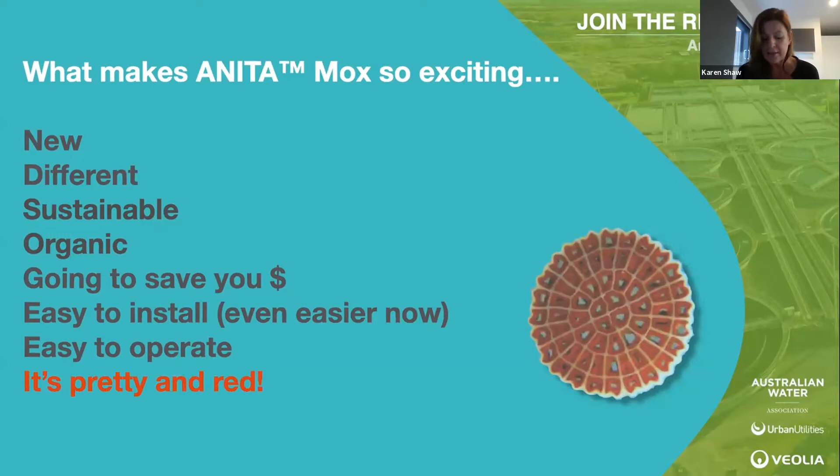And last but not least, the color of the Anita Mox plant will tell you a lot about how your process is performing. Let's not underestimate how great it will be for our operators to be able to look into a tank and have a good idea, based on the color, of how well the process is doing.

So that being said, I think it's time now to move to Romain's presentation, where we'll find out more about why we should all be seriously thinking about adding a splash of red to our boring brown wastewater treatment plants. So I shall stop sharing now and hand the reins over to Romain.

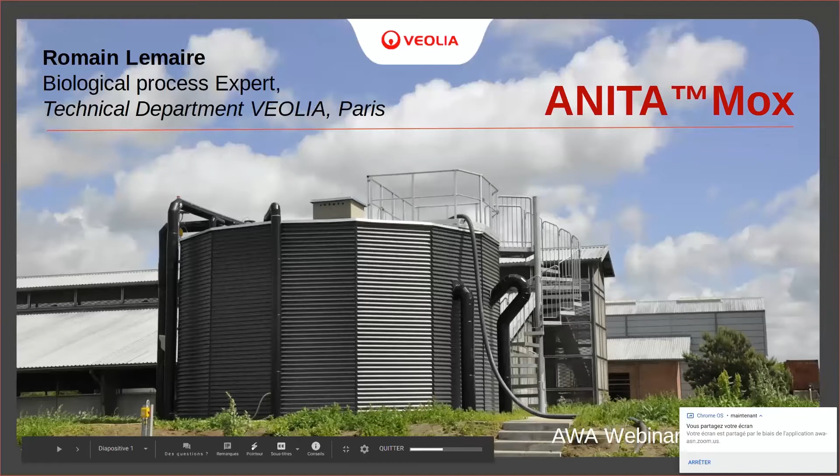So I'm going to introduce you to the technology, but first we'll talk a bit about Anita Mox itself and introduce you to the topic before jumping into the process itself. So let's start with what is Anita Mox, and before that, which is the Veolia process, what is Anammox in general?

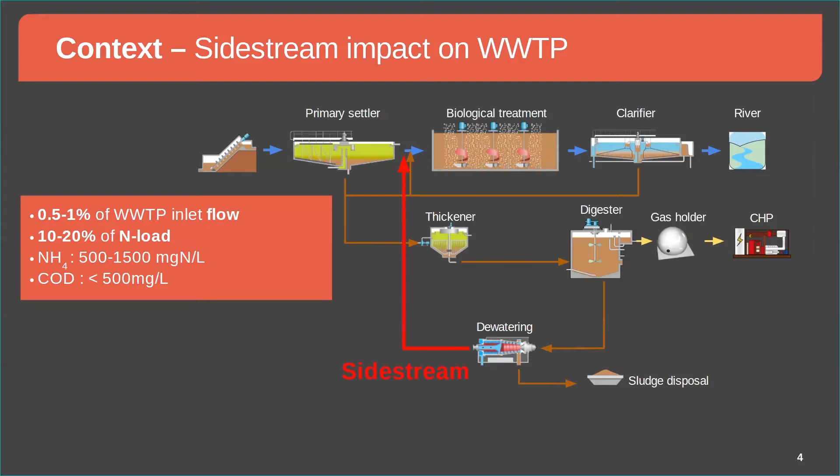If we look at the wastewater treatment plant, we can see a general layout with your water line at the top and your sludge line at the bottom. What we can see is when we start having digestion, when we want to make use of all the solids generated through your wastewater treatment plant, what we generate is what we call the side stream after the dewatering. This side stream is very little flow, 0.5 to 1% of the inlet flow of your plant, but represents 10 to 20% of your nitrogen load, which is significant. Ammonia concentration is usually quite high, and COD is very low, as we've made biogas out of it in the digester, so the carbon left is little.

What it means, and it's even worse, is more nitrogen when we add the THP, thermal hydrolysis, which is quite popular now in Europe, in the US, and also in Australia. This will just strengthen the side stream with even more nitrogen return, up to 30% of your inlet nitrogen coming through that side stream. The impact of that return is basically, in a biological treatment line, you're going to require more oxygen to nitrify that nitrogen load, so a bigger blower.

You return mostly nitrogen, little COD, so you unbalance your C/N ratio. For denitrification, you might end up having to add carbon into your system. And then you might put at risk your outlet ammonia and TN discharge limit, and maybe get fined for not being compliant all the time.

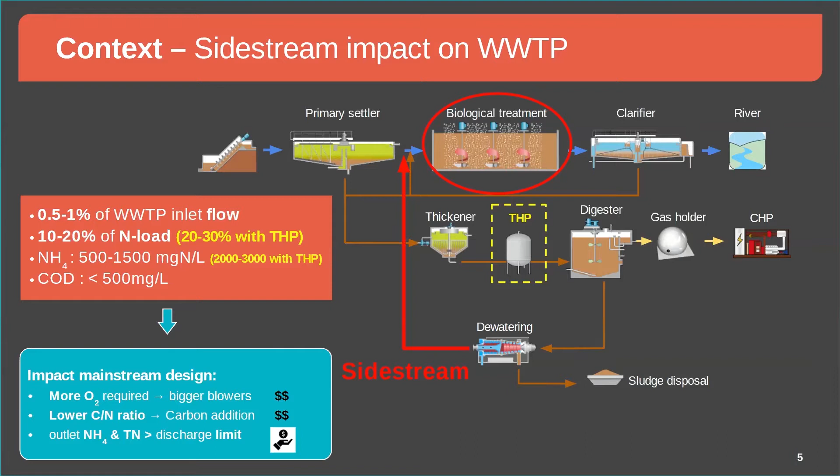That's why we developed this Anita Mox process to fit into that reject water, that side stream, and to treat nitrogen directly into the stream before it is recycled or returned back to the main plant. So Anita Mox is the name of the Veolia technology using the Anammox technology.

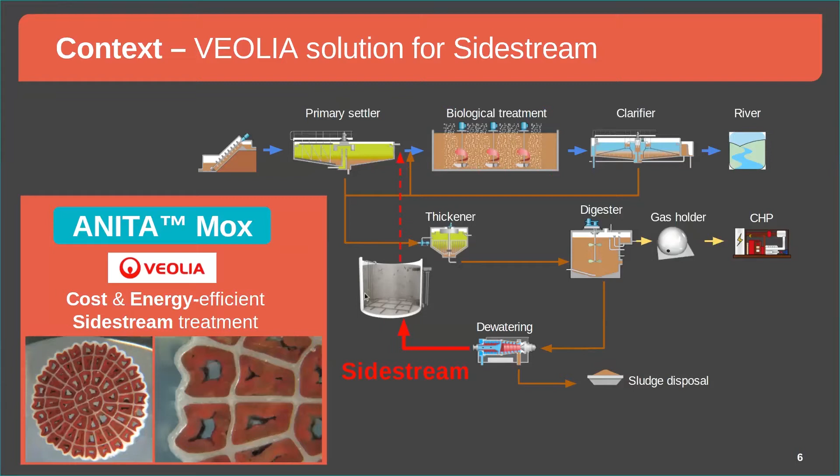And to denitrify down to N2. This is on the anoxic condition, no oxygen. And we need COD, carbon. For the Anita Mox system—so this is the conventional nitrogen removal pathway.

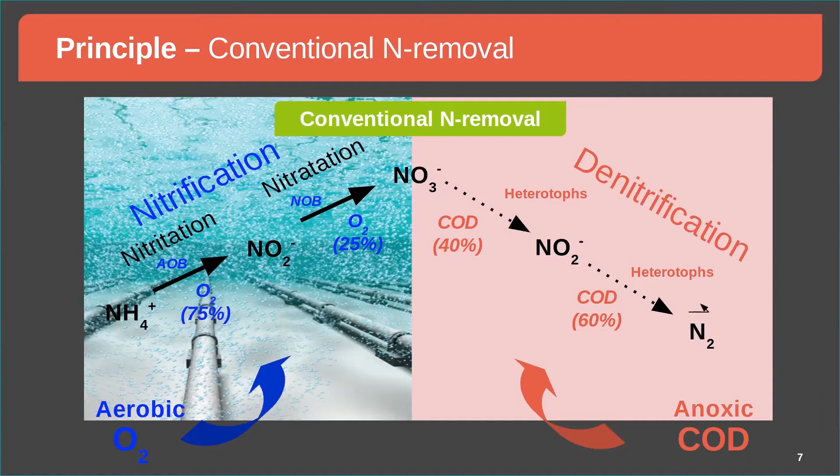With the Anita Mox, the beauty is we can reduce the oxygen need, and we don't need any carbon. We don't need any source of COD. So now we only need to nitrify to nitrite only, NO2, not all the way to nitrate, but only a fraction or a portion of the ammonia, around 50–55%.

And then with the nitrite and the ammonia remaining, the Anita Mox bacteria will do the job and will convert that to nitrogen gas and do the so-called denitrification, but with no external carbon required, which is really good for centrate because they don't have any COD. And then we can have a full nitrogen removal without the need of

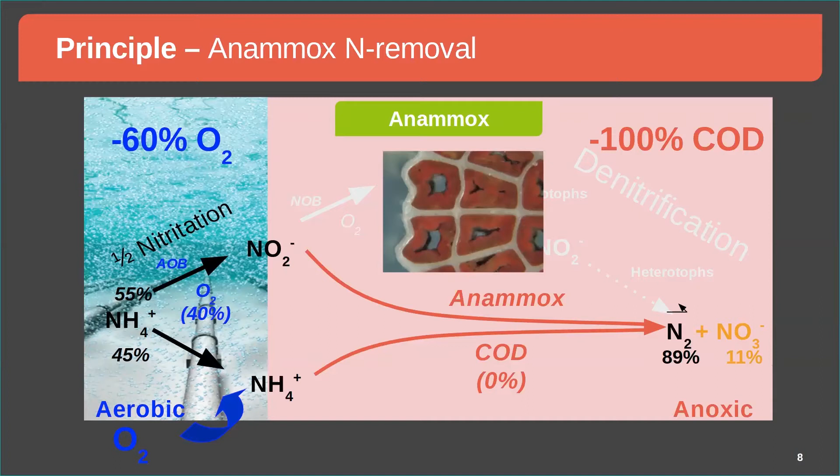So to summarize the advantage of the Anita Mox process compared to the conventional N removal with nitrification and denitrification: conventional N removal is a big slope to go up the mountain with oxygen, needing a lot of oxygen to convert all the ammonia to nitrate. And then downhill, we need a lot of COD, a lot of carbon to denitrify down to N2, nitrogen gas.

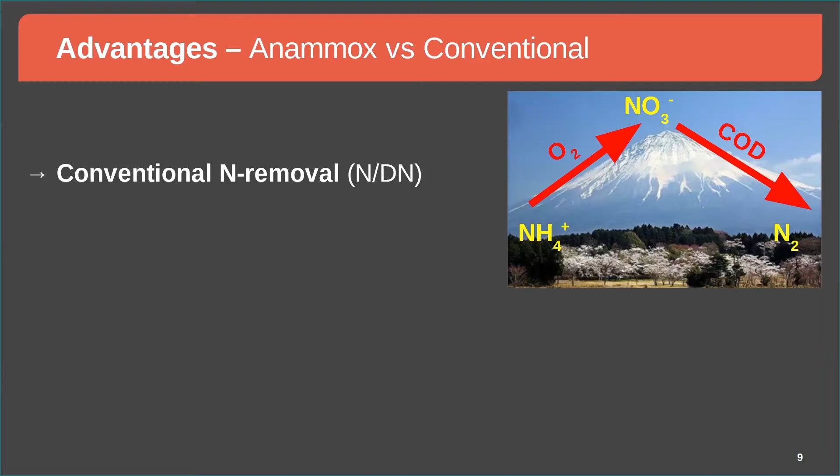With the ANITA Mox, it's a bit different. The mountain is a bit smaller, so it's more like Mount Fuji versus Uluru for you in Australia. But we need a tiny bit of oxygen, or less oxygen, because we only nitrify a portion of the ammonia and only to nitrite, not all the way to nitrate. And then with the ammonia left over, we go all the way to N2 with no COD.

So the advantage of this is less oxygen consumption—stoichiometric minus 60% saving—no COD requirement, so we don't need to add any carbon, and there is no carbon in that type of centrate. Obviously, less CO2 emission because we don't add any external carbon, and we use less energy for the aeration, and less sludge production as well, because that bacteria is a slow grower, and we don't use any heterotrophic bacteria to do the denitrification, which produces a lot of sludge.

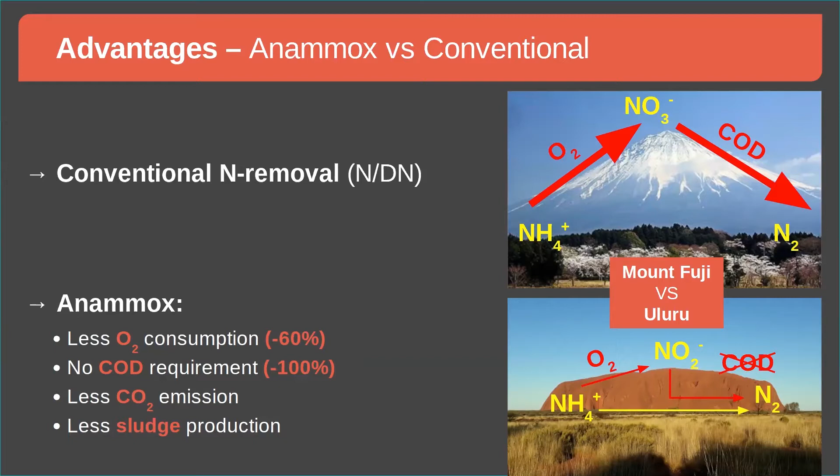So there is always some challenge. And why haven't we seen Anammox before in a normal plant?

For a few reasons. First, it's a very slow grower—challenge number one. If we compare the main populations involved in a wastewater treatment plant, we have the COD removal done by the heterotrophs, and the growth rate, or doubling time from one bacteria to two bacteria, is around an hour, couple of hours.

For the nitrification in orange, the nitrifiers, we know they're slow growers. So to make two bacteria out of one, it's around a day, 1 or 2 days, based on conditions. When we look at the Anammox bacteria, we're talking about 1 week, okay?

So the order of magnitude tells you that this bacteria needs the right condition and the right retention mechanism to stay in the system. This slow growth rate can lead to long startup when we want to start up these processes.

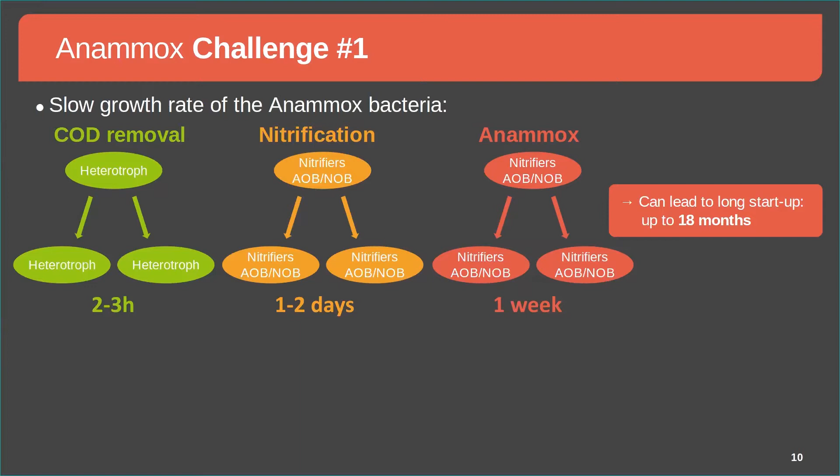We developed a special strategy at Veolia called the Biofarm, and the idea is to pre-seed with some Anammox into the system so we can start up quicker. We can get up and running quicker, and we can reduce the startup time down to 3 to 4 months based on the project. But keep that in mind—slow growers, so we need to give the right condition and the right retention of the bacteria into the system.

Challenge number two with the Anammox technology is we need, as you've seen, the substrate, the key substrate is nitrite, NO2. We need to make sure all the ammonia goes to nitrite, or a portion of the ammonia goes to nitrite, but not all the way to nitrate. If it's nitrate, the Anammox can't do anything with it.

So we need to keep it to the nitrite level. To do that, we need to make sure that those bacteria called NOBs, which oxidize nitrite to nitrate, are suppressed, or the growth is under control, and we don't have that in the system. We need very good aeration control to produce nitrite and not nitrate, and that's the key for the Anammox.

We need a bit of aeration to go to nitrite, but not too much. The Anammox don't really like oxygen, so we need to provide oxygen for the nitrification stage, but not for the Anammox. So it's a very sensitive parameter, aeration.

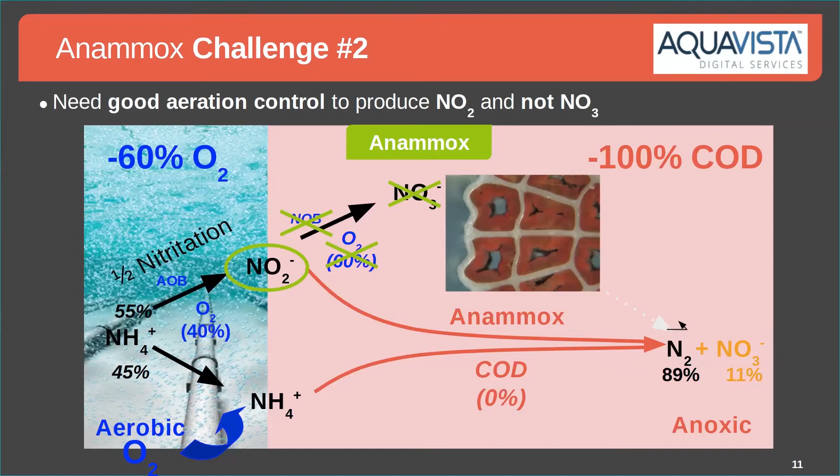And for that we have advanced aeration control through the Aquavista services, digital services, and that allowed our Anammox process, the Anita Mox, to be producing mostly nitrite and avoiding going all the way to nitrate. So that's the background of the Anammox.

Let's jump into the Anita Mox process now, the Veolia process. So it's based on the MBBR technology that some of you might have heard before, moving bed biofilm reactor, from AnoxKaldnes, which are the leader in that technology and are part of the Veolia family for many years now, based in Sweden. So the MBBR technology is very basic.

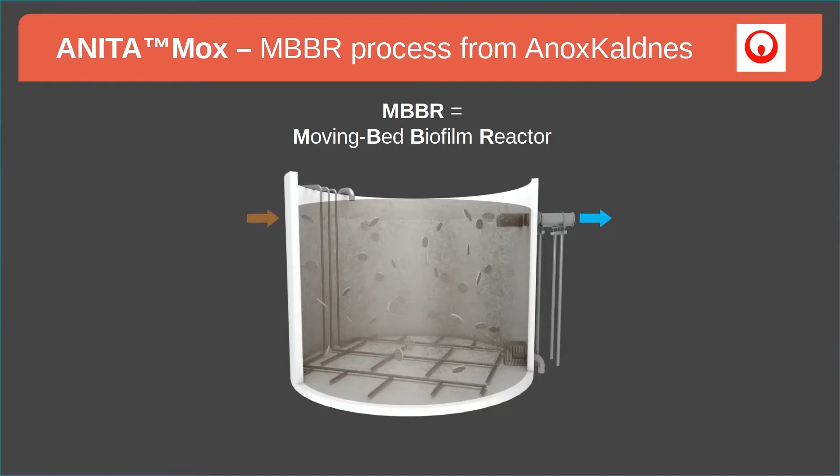But first, you have the media. You have one tank, you have media for the biofilm to grow. You have a sieve, what we call a sieve. It's to retain the media, the plastic media, but the water can go through in the outlet. So it's a physical barrier for the biofilm to stay in the tank.

And finally, we have an aeration system or mixing system when it's anoxic, but in our case, we need aeration. Stainless steel, robust, coarse bubble, but we can also use fine bubble for some projects and for the Anita Mox as well. But usually it's a robust aeration system.

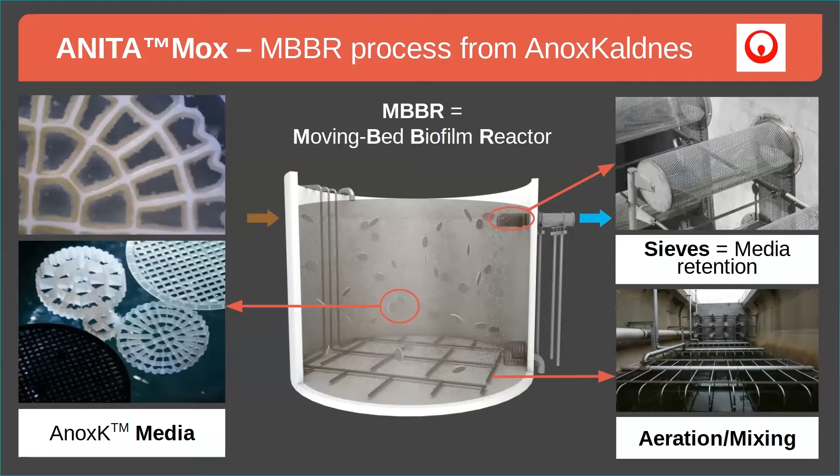So looking now into the detailed mechanism of the Anita Mox. As I told you, it's an MBBR process, but if we zoom into what happened on the biofilm, you see a picture of a K5 carrier with Anammox bacteria with that red specific color on it.

If we zoom into a little square, here we go. We have the media, the plastic media in dark, and then we have the biofilm growing on the top. We have the liquid, the bulk liquid around.

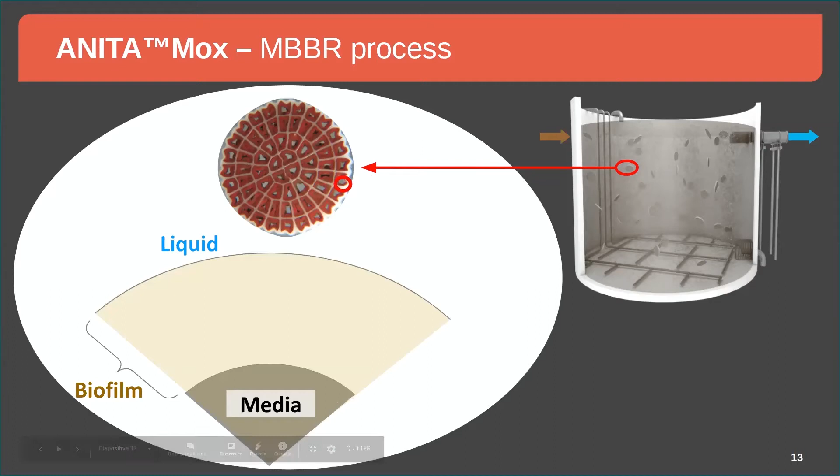If we apply some oxygen gradient, we're going to create simultaneously in the biofilm an aerobic layer on the outer layer of the biofilm, and deep in the biofilm we're going to have anoxic conditions with no oxygen. That's why it's key to control oxygen. We want enough aerobic zone for the nitrification, but not having the oxygen penetrating fully the biofilm, to leave that anoxic layer deep in the biofilm for the Anammox.

So what happens after with ammonia? Ammonia in the bulk will diffuse into the biofilm, will be used by the nitrification, those AOB bacteria, the nitrifiers, on the outer layer of the biofilm using oxygen.

And then the produced nitrite and the leftover ammonia will diffuse further in the biofilm, and the Anammox will be located deep inside where the oxygen is not present. The Anammox will finish the job, converting nitrite and ammonia into nitrogen gas. So that's what happens in reality in this Anita Mox process on the biofilm, all happening simultaneously.

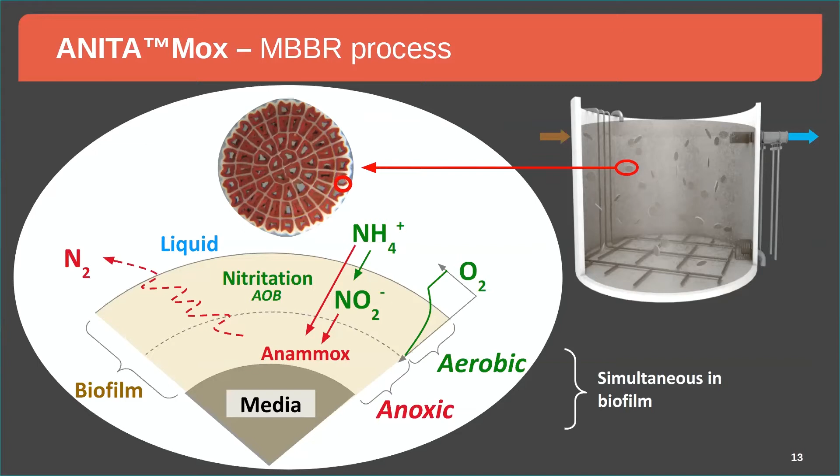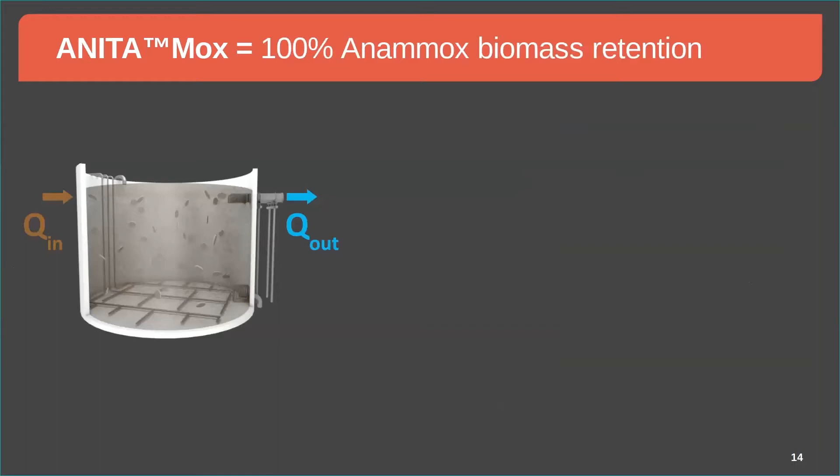Another big advantage of using this technology for the Anammox process is the combination of the media and the sieve, which means we have no risk of losing the biofilm and the Anammox from the system. This is key because it's a very slow grower, so we need to make sure we retain most of the bacteria in the system. We're relying only on mechanical separation. Once the Anammox is on the media, there's no way, as you can see in this photo, that it can go through the sieve and leave the system. We don't rely on settability, density, and so on. It's pure mechanical separation and retention of the media.

The other good thing is when you have a lot of TSS coming in, which can happen when we operate a centrifuge on digested sludge. As an operator, and Veolia operates many plants, not just as a technology provider but also a plant operator, sometimes TSS can go very high in a short time period when we start a centrifuge, for example. In the case of the Anita Mox, all the TSS coming in will come out through the sieve, with no interference with the media. So when you have a big flush of TSS, it will go through the system nicely.

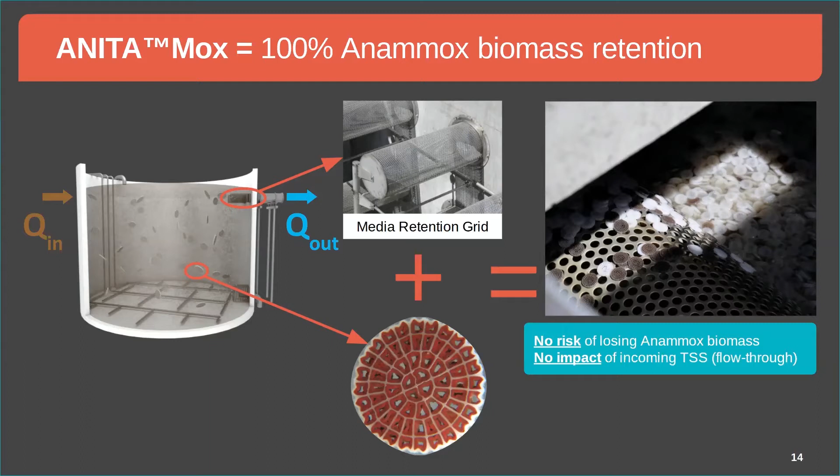So that's the background of the Anammox and the Anita Mox process. Now I'm going to show you when and where to apply this technology, where the sweet spots are.

We've been talking about that MBBR configuration so far, pure MBBR, what's coming in comes out, no sludge recirculation. We are targeting sidestream, obviously, with soluble biodegradable COD to ammonia ratio, or SBCOD. This is a key parameter to follow in your sidestream, reject water, or effluent you want to treat with Anammox. If it's relatively low, so we don't have a lot of carbon compared to ammonia, we use this pure MBBR configuration. Conventional anaerobic digester reject water is no problem, and some industrial effluent as well.

Am I losing the sound, or no? Hope you can still hear me. We can still hear you, Romain. Okay, I had a strange noise in my headphone. Just wanted to make sure I wasn't talking alone.

Then some industrial effluent, as I was telling you, it's compatible with high TSS coming in, very robust and easy to operate. Single tank, what's coming in comes out, and it's most of our references so far.

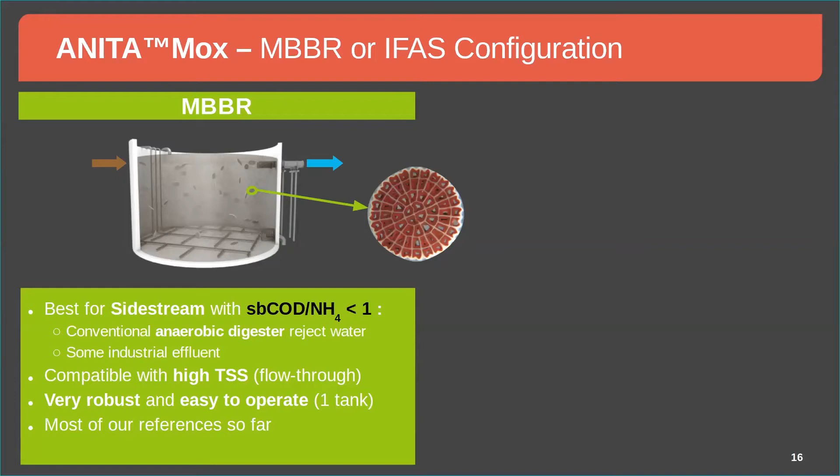We also have an IFAS solution. IFAS is like MBBR, but in the back end we put a clarifier to return some of the sludge. At the end we have a mixed hybrid system with media in the tank, but also some suspended sludge, normal activated sludge, which is recycled, giving us a mixture of suspended sludge and biofilm with the Anammox.

We use this hybrid configuration when the soluble COD to N ratio is higher, when your sidestream has more carbon than usual. Typically we use this configuration when you have a THP, thermal hydrolysis process, before your digester as a pretreatment, because you usually have more VFA, more COD coming out from digestion. Also for co-digestion systems, when we have a lot of different waste, not just municipal sludge, we use this IFAS configuration. It is a bit more impacted by TSS coming in.

We need to be a bit more careful on how we operate the centrifuge or dewatering, because now we recycle the sludge. So if we have a lot of TSS coming in, it will accumulate in the system. But it's more compact than the MBBR version, so if we have a problem of footprint or need a small tank, sometimes we can go for IFAS instead of MBBR. We now have references in IFAS, mostly on THP, and also for mainstream applications—not just for sidestream, but for normal municipal wastewater, we are starting to use the Anita Mox on this type of stream with this IFAS configuration.

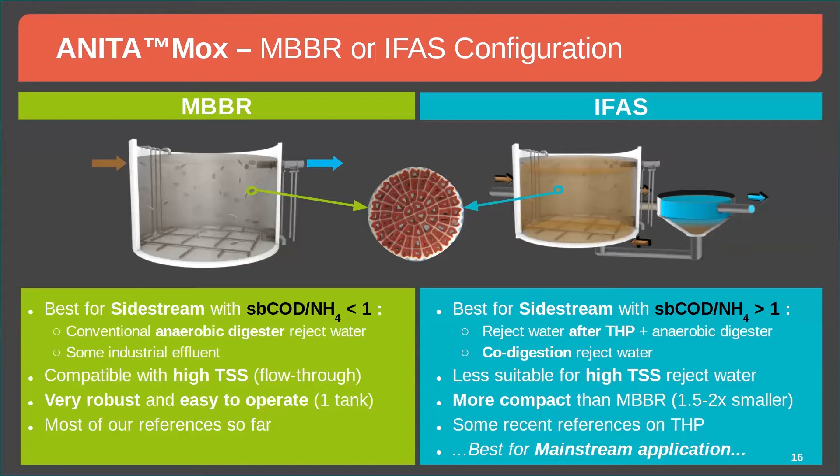A little slide to highlight THP reject water specifically, because it's quite specific and it's been reported that it can be inhibitory. It's a challenging type of reject water to treat when we have THP, and I want to highlight the risk mitigation and how we address the risk with the ANITA Mox.

The main risk that people know about when treating THP with the ANITA Mox system is inhibition of the AOB, the nitrifier, and the Anammox due to the specificity of this heat thermal hydrolysis pretreatment.

We also have a negative impact from some of the refractory COD, or some of the biodegradable COD like VFA, which is higher in that type of centrate, on Anammox development. So we have competition between the Anammox and the normal heterotroph bacteria. This can lead to the loss of Anammox from the system, so we need something that retains the Anammox well. There's also a higher risk of unwanted nitrifiers developing, the ones going from nitrite all the way to nitrate. So these are the four main risks when dealing with THP.

Now let me show you the contingencies we have for those risks with the ANITA Mox. For inhibition, we always provide flexible extra dilution capacity, up to 2 volumes of dilution for 1 volume of centrate. Usually we are at 1:1 or 1.5 to 1, but we can go up to 2 if there's a problem with inhibition.

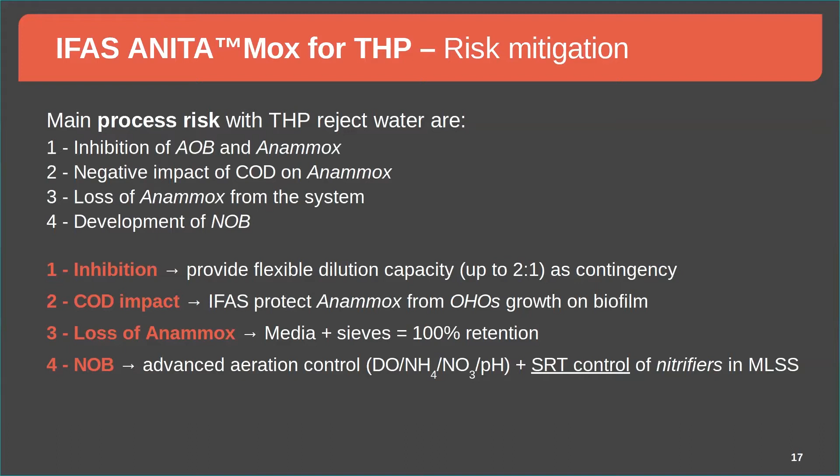To conclude on THP, keep in mind that Veolia is not just an Anita Mox provider technology, but also the only Anita Mox provider technology with a lot of experience with THP. More than 20 years - we've developed our own THP process called Biothelys and Exelys. We operate many THP plants, and that expertise has been put into the Anita Mox to make sure we know how to deal with this difficult centrate.

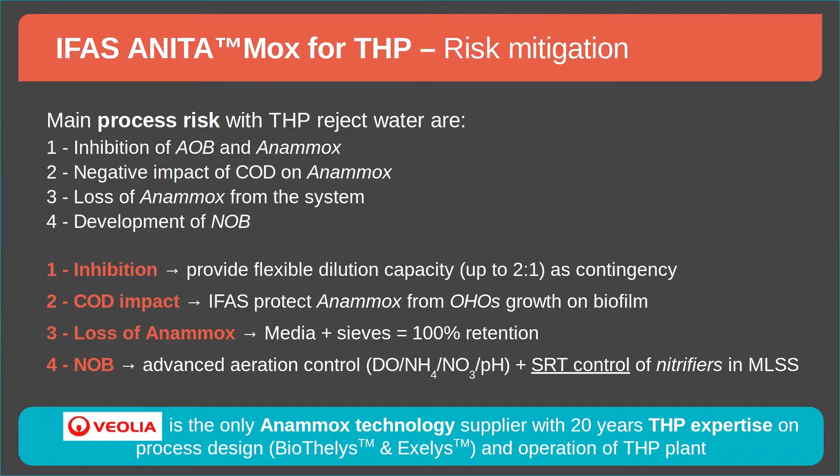So finally, before handing the floor to Justin to talk about the Luggage Point project with the ANITA Mox, let me show a few other references and case studies worldwide.

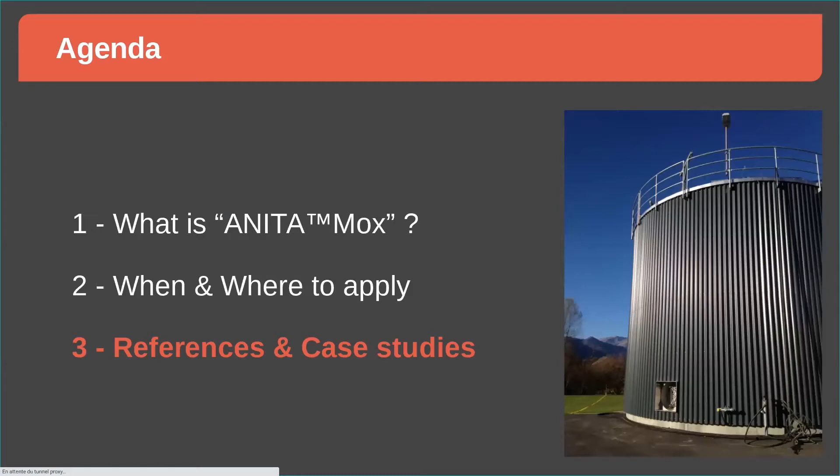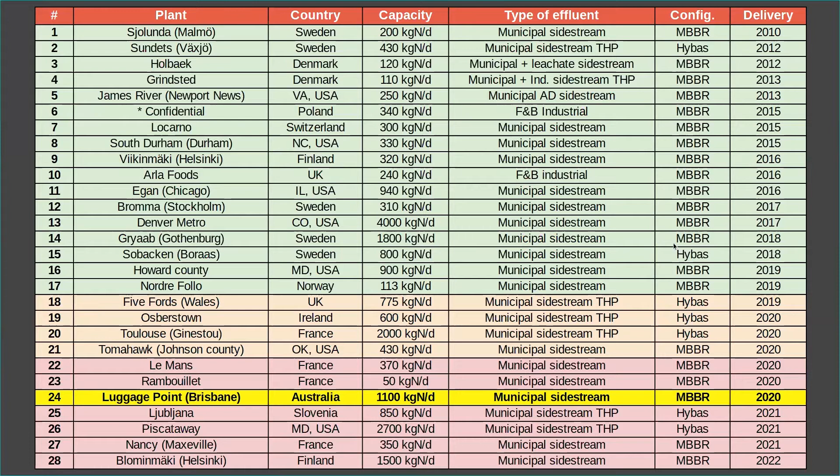Mostly municipal, with a few industrial references as well, and mostly in MBBR configuration, but some also in IFAS configuration. Looking at where it's located worldwide, mostly in Europe - 20 plants are in Europe, 5 in Sweden with our colleagues at Anox Kaldnes, 4 in France, then scattered across the rest of Europe.

It's been really successful in the US as well - the Anammox crossed over the Atlantic to the US, and it's a very mature technology there, with all the utilities embracing the Anammox technology. We have 7 references in the US, and now the Anammox has lately been making its longer journey to Australia and to Brisbane. That's very exciting, actually, to be there now.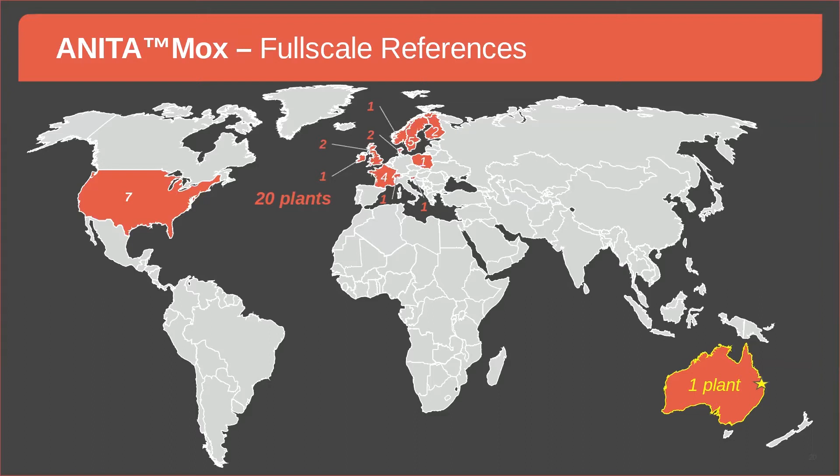So Denver - just a few shots of some of the references. In Denver, it's the biggest Anita Mox so far, treating 4 tons of nitrogen per day. It's a very big plant in Denver, roughly 2 million PE. You see the photo of that plant, and the Anita Mox is basically reusing some of the existing tanks, just at the bottom here.

The MBBR technology is very good to retrofit existing tankage you can have on site. We just need a basin of whatever geometric shape, basically.

So if we look at Denver, that's how it looks like. Few Photoshop images of the plant we retrofit. So you see the empty plant with the sieve, which been located, the aeration grid, and some mixer.

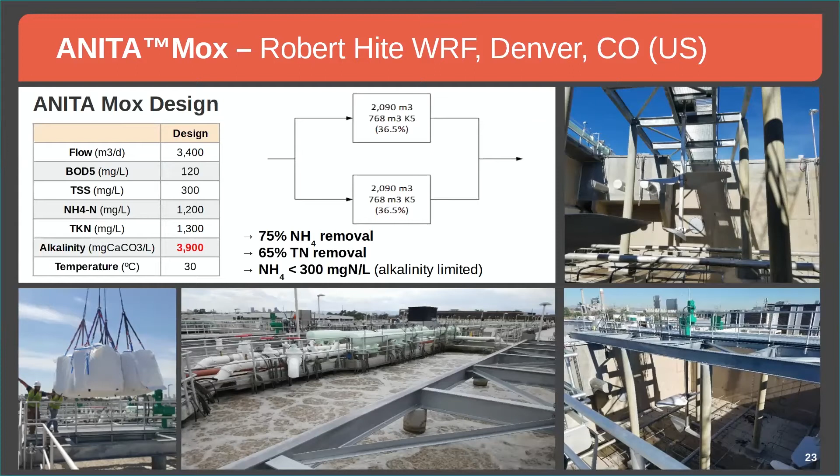Two side-by-side reactors. The only specificity of this project is alkalinity was low, much lower than normal centrate, because they're using ferric to dewater. So we have some consumption of alkalinity, meaning that without dosing extra alkalinity, which we don't have in most of the reject water, but in that plant, because it's limiting, we can't reach more than 75% ammonia removal.

And the ammonia in the outlet stays relatively high, around 250, 300 for this project. But if we look at, so this is a graph from the client, from the operator. So in blue, you have the load. You see the ramp up in 3 months' time. But in 3 months' time, we've been able to start treating the design load of 4 tons per day.

By putting only 5% of the media which were seeded with Anammox, okay? So it was a very quick startup for an Anammox process. So in blue, we can see now we are at the design load. And in red, it's the ammonia in the outlet. And we can see that we are quite high, much higher than what we usually are, around 100 to 150.

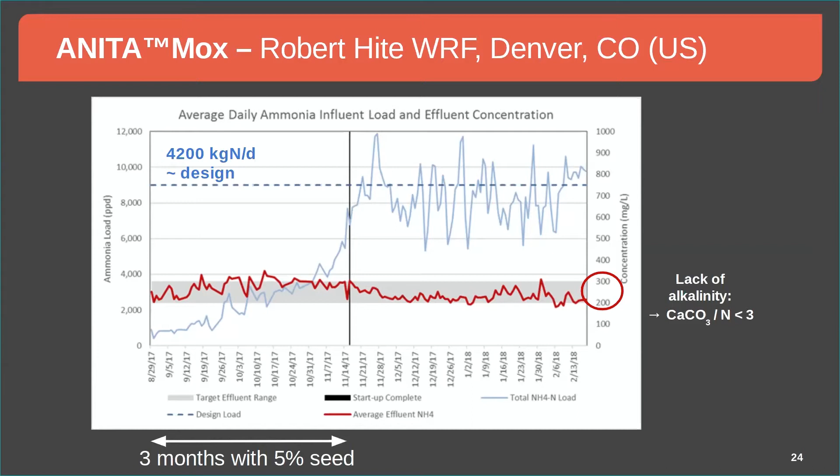But it is due to the lack of alkalinity. But it's okay for the client to be around that level. It doesn't want to dose any extra alkalinity, so we do with what we have.

Again, in Chicago, again, retrofit of existing tankage. So this time, it was unused DAF. So we retrofit 4 DAF into Anita Mox. You can see some photos there.

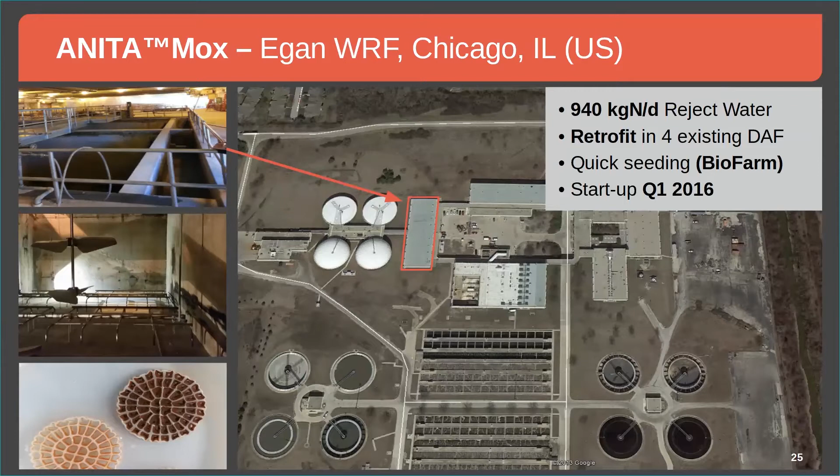The good thing about this Egan plant is you see that we have, in blue, it's the load again, the ramp up. We started the ramp up, and after 1 month, the client said, okay, sorry, I've got a problem with my digester, we have to shut down everything. We have to put the digester into maintenance and do some operation. So basically, we had almost no flow for 8 months, nothing.

But the bacteria, the Anammox, the seed were there. And when we restarted after 8 months, you can see that the ramp up has been really quick again to reach the design load of around 1,000 kilograms per day. Those Anammox are very resilient. Once they're on the media, they can stay there happily, and we store them for more than 2 years. And when we restart, the activity is still there. So it is very resilient once you have the Anammox on the media.

And you can see in green the ammonia removal being around 85 to 90% on that plant.

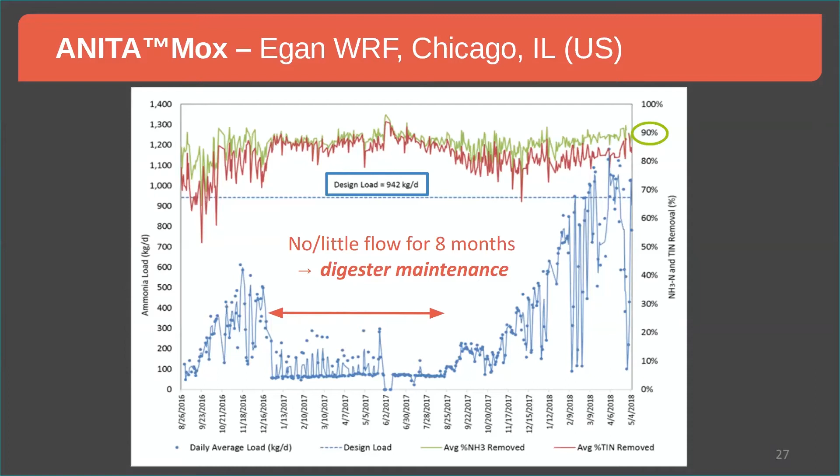Again, same plant, you see the ammonia level coming in, fluctuating between 1,000 and 1,400 milligrams per liter. And we're always below 200, which is what the operator wanted in his return, less than 200 ammonia, which has been the case for now for more than 4 years.

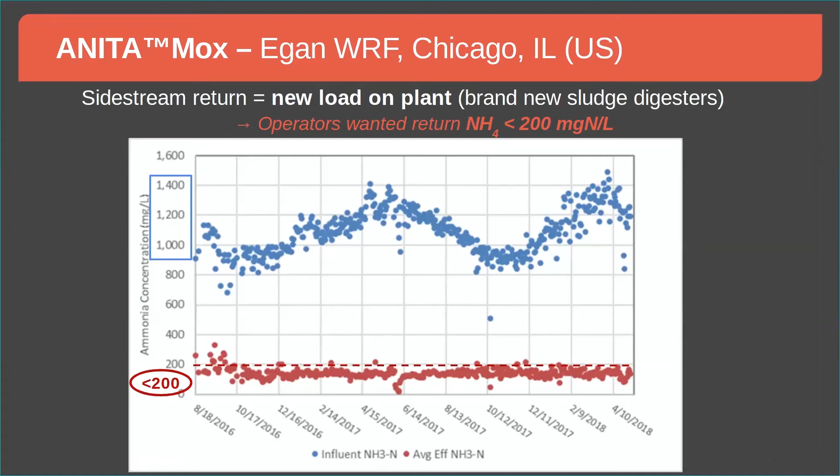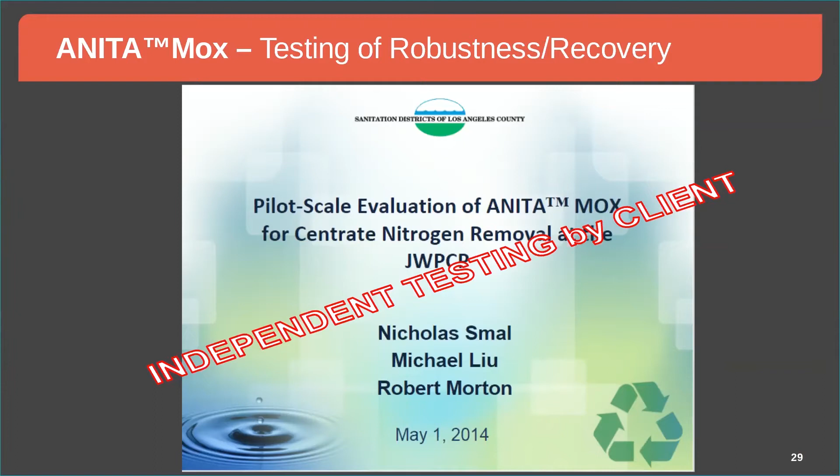I will show you very quickly an independent study, so you can find all the papers on that by Los Angeles County, the municipality. They've been testing an Anita Mox pilot for more than 2 years for their big plant. So it's a big plant in Los Angeles. It's one of the biggest in the US, the Joint Water Pollution Control Plant, so a 3.5 million PE plant.

They're only doing, they don't have nitrogen consent at the moment in California, but it will come into force in a couple of years. So they are already testing technology which could reduce the nitrogen to treat on the main plant.

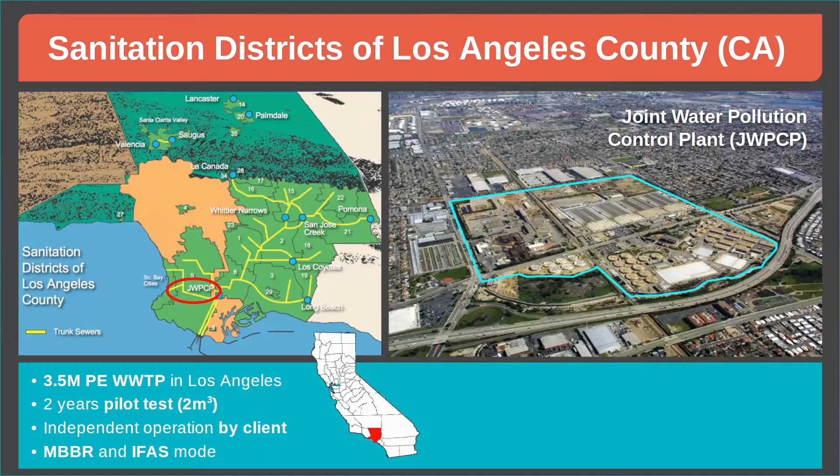They have that existing digester, so they wanted to test a pilot, both in MBBR and IFAS version, for more than 2 years. And what they've been testing, at the end of that period, they wanted to do what we call robustness testing, and you see 6 scenarios.

And what they wanted to do is disturb the system with some scenarios you can see, like power shutdown, no electricity for 24 hours, no feed, like you've got a problem with the feed, or no centrate available, or you overfeed by 100% more for 24 hours. What happened? No aeration, over aeration. So we know aeration is a critical parameter. What happens if the control system of the aeration goes berserk? You get way more air than you actually require. And also trying excess polymer.

We know that polymer can be a bit fuzzy sometimes when you have too much, for the nitrification and even the Anammox, and on the oxygen transfer as well. So they tested all that.

What they did is apply that event, you can see at the bottom in yellow, for 24 hours, and then measure the recovery time to go back to the same performance as before the event. For each scenario, the recovery time was around 8 hours, so very, very short.

To 1 day, pretty much, or a day and a half to get back to what it was. The more problematic case is when you have no aeration at all for 24 hours, or when you have a lot of excess polymer, which can take a bit of time to recover. But basically, it shows you the robustness of the system through what we all know will happen in the normal life of a plant, some few hiccups along the path.

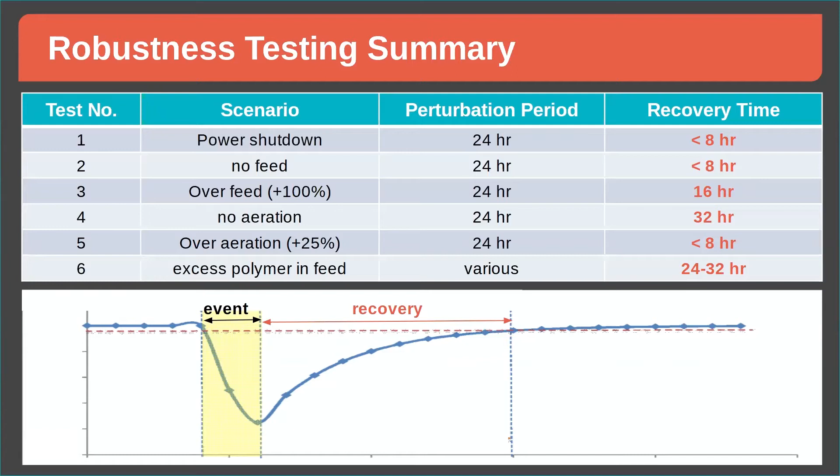Second to last reference to show you THP. That's one of the first ANITA Mox plants in Sweden, in Växjö. What I want to show you on that plant is the fact that we retrofitted a very shallow tank first, an existing SBR dosing methanol for reject water, and we revamped that tank, kept the fine bubble, into an Anita Mox. Started in January 2012, but then in 2015 the client wanted to install THP, which he did, and basically it was the first Anita Mox system treating THP, and it's been the case for more than 6 years now. It was actually in late 2014.

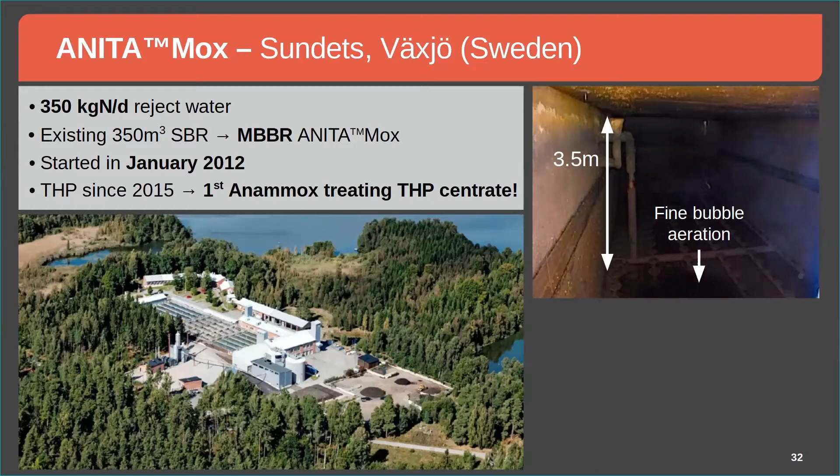It was MBBR. As I told you, it's better to have IFAS. So for 3 years, the system was treating THP with the normal MBBR configuration. And in May 2018, we converted the system into IFAS by just adding one of those small clarifiers that the client had laying around in stainless steel, just a 5 square meter clarifier, to be able to operate this as an IFAS, which is better for when you have THP. I will show you in a minute the results.

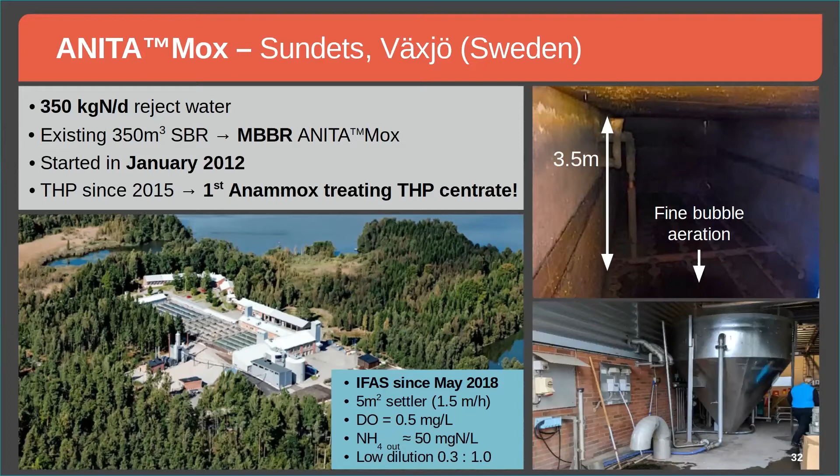This is the pre-THP, so normal sidestream, treating around 140 kilogram N. So the client didn't have at that time the full load on his plant. In black, you have the ammonia coming in around 1,000, but fluctuating a bit. In red, the ammonia coming out, so on average around 90 milligram per liter. So quite low, and that for more than 3 years.

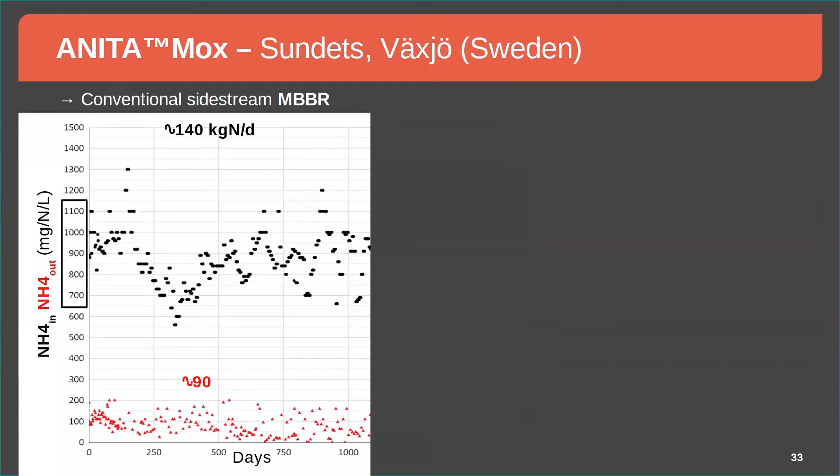Then he added THP, and we kept the MBBR configuration because at the start we didn't know that the client would put THP. So it was MBBR Anita Mox. We had to do a 40% dilution, so almost 1-to-1 in volume dilution. We're treating a bit more, 160 kilogram N per day, like all the centrate produced. But the residual ammonia in the effluent was around 160, so a bit higher.

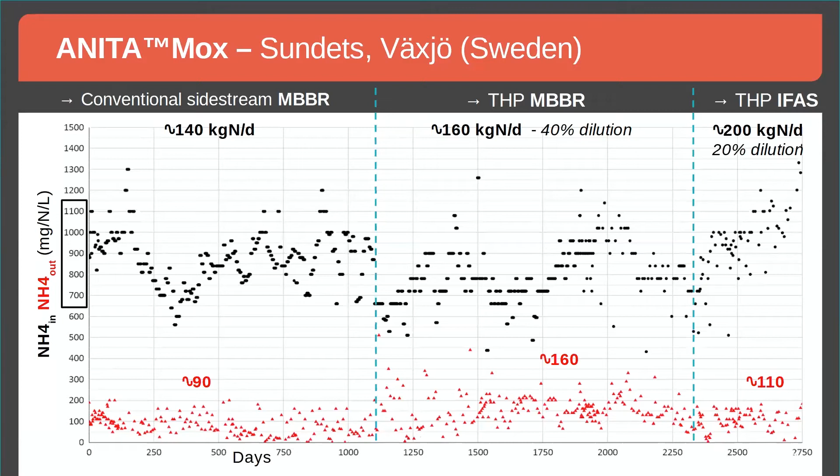You can see at the start we had a few hiccups when, as I told you, THP can be a bit problematic at the start. But it did work in MBBR, though we were a bit higher and it was more sensitive. Then we decided in 2018 to switch to IFAS, and you see that we could increase the load and reduce the dilution as well, which is good, down to only 20% dilution required, and the ammonia in the outlet was low as well, around 100. So that was the first Anita Mox treating THP.

As you can see here, in black is the ammonia coming in, in blue is the ammonia coming out, and in red is the ammonia removal percentage. Around 1,000 coming in, and the dotted line, so after 150 days, we treated all the centrate which was available. So we had this ramp up period to colonize the virgin media with the seed we put in, and then we were able to treat.

So we don't have the design load. We have 700 now, 750 as we speak. The design is 900, but we are treating everything which is produced. And we are around 90 to 95% and 80 to 90% ammonia removal.

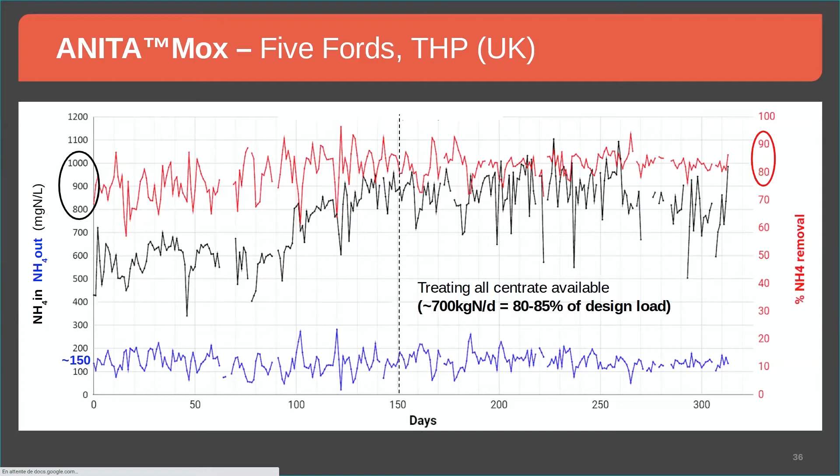So that's it for me. To conclude, Anita Mox is the Veolia Anamox process, either in MBBR or IFAS configuration.

It's a biofilm system, so we don't rely on any settleability or density of granule. It's robust, and we have ultimate 100% of the ammonia retention in the system using MBBR or IFAS. So it's different than most of our competitors, which are using granules or density to separate the Anamox from the other sludge.

For the sidestream application, it's a very mature technology now, even if it's new for the Australian market. More than 25 references and more than 150 Anamox systems worldwide, not just our Veolia one, but all the other processes. So it's very mature, a lot in the US, in Europe, starting in China, in Asia, and now in Australia, mostly for municipal.

Centrate. But also we can use it for THP when we have a THP pretreatment before that, and in that case we use IFAS. Also for industrial effluent when you have to remove ammonia and you don't have a lot of carbon in your industrial effluent. Simple and robust, I talked about that already.

And just a little pitch about mainstream activity. So we have been piloting a lot on mainstream applications, on how to treat with the Anamox on the mainstream water line, not just the reject water from digester. It is working on the pilot level.

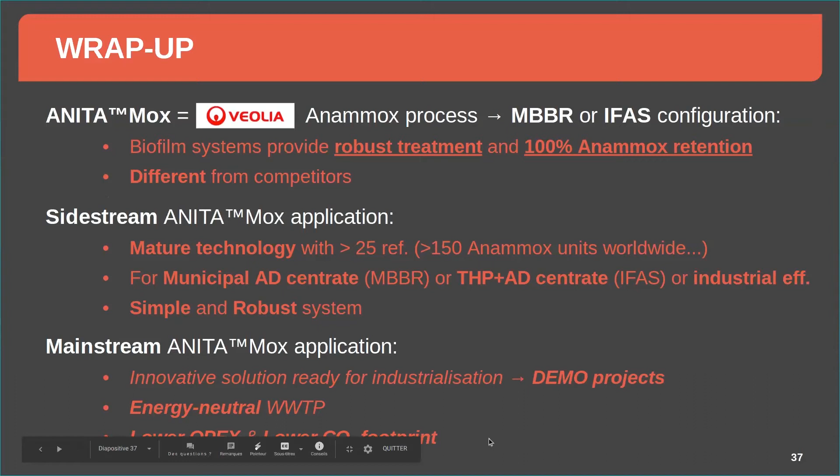It should be able to share his screen. Are you with us, Justin? Stop share. Yeah, just yep. Stop sharing. Yep, cool.

Cool, so hopefully everyone can see that one. Yes, we can. So good afternoon, everyone. My name is Justin Todhunter.

I work as a process engineer with Urban Utilities, and I think it's an awesome opportunity that I have here today to present alongside Veolia. My presentation today will talk a little bit about our journey along the path to full-scale ANITA Mox at Luggage Point, and some of the success we've had so far, and also some of the success we hope to achieve from its implementation.

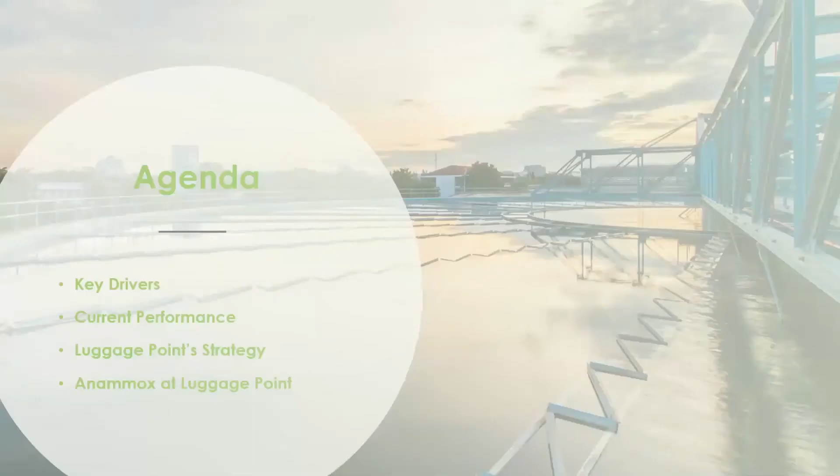Just a quick overview of the presentation. First I want to talk about some of the key drivers around the selection or choice to choose this innovative technology. That will follow into some of the current performance of our plants, and a little bit more about the treatment strategy at our largest treatment plant, at Luggage Point. Finally, a bit about the upcoming project, or the current project, of the ANITA Mox at Luggage Point.

So who are we? Urban Utilities was formed in 2010, following the merger of 5 councils, and we provide water and sewerage services to about 1.4 million residents. We currently own and operate 28 treatment plants across 5 separate councils, with the majority of our treatment plants falling within the Brisbane River catchment, and the effluent from a lot of our plants ends up within the Moreton Bay region.

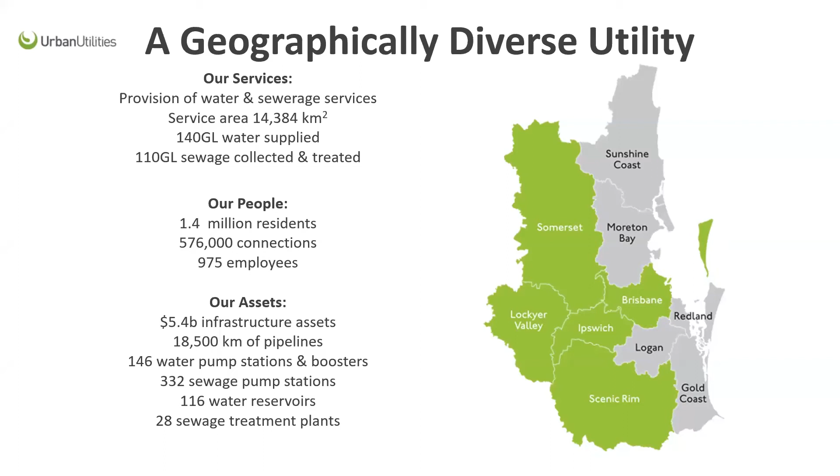So why is this important? Moreton Bay is an environmentally significant area. It supports a vast array of marine life within South East Queensland, and it also has significant economic value in regards to recreational and commercial use. Therefore, managing nutrient emissions from our treatment plants, specifically nitrogen and phosphorus, is an important part of our role in maintaining the health of the bay.

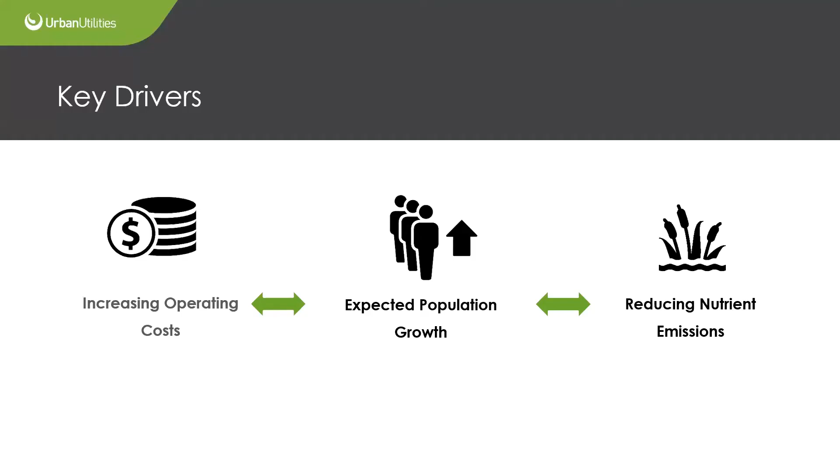With the expected population growth within the catchment area, and changes in catchment characteristics such as industry loads and water use profiles, Urban Utilities faces ever-increasing pressure on balancing these nutrient emissions, operational costs and treatment capacity. Ultimately these pressures are reflected in the cost to the customer for providing these wastewater treatment services. So with these key drivers, we really have to look at alternative nutrient strategies to enable improved outcomes for Urban Utilities, its customers and the environment.

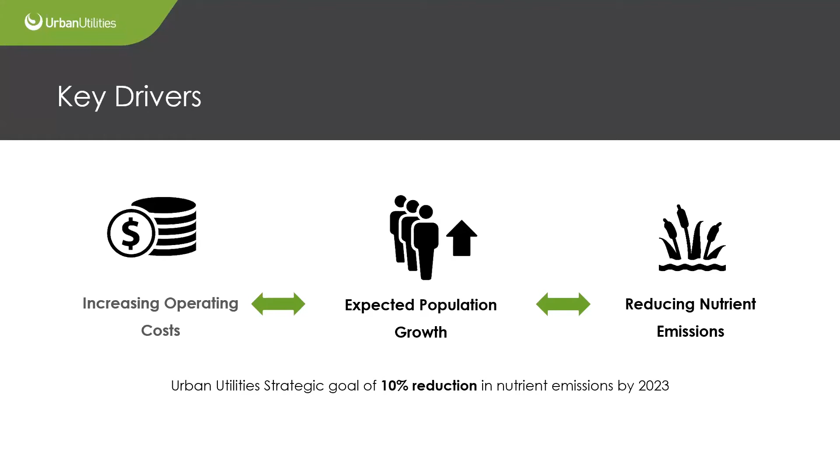Introduced in 2016, the bubble licence was the first of its kind for the lower Brisbane River catchment. Compared to traditional effluent limits for individual STPs, the permit allows Urban Utilities to operate 9 of its treatment plants under a combined annual mass load limit for nitrogen and phosphorus.

These 9 treatment plants discharge within the Brisbane River catchment into Moreton Bay. The implementation of the bubble licence has presented both a risk and an opportunity to achieve greater emissions reductions by shifting our attention from smaller, more costly treatment plants to focusing on the performance of larger treatment plants.

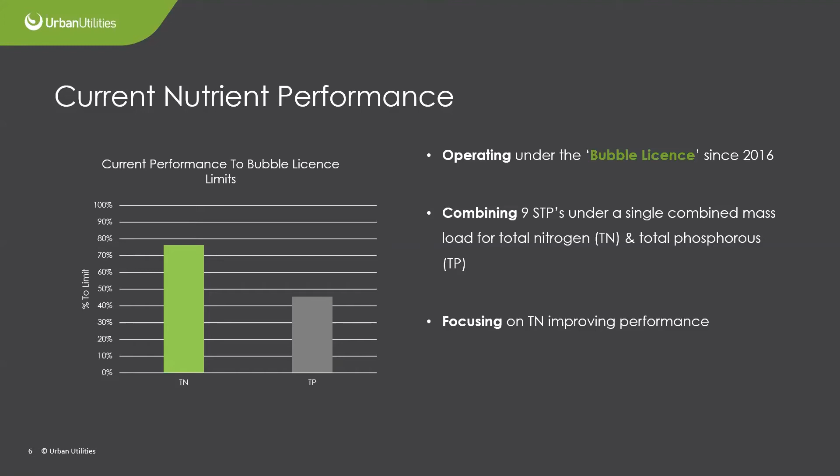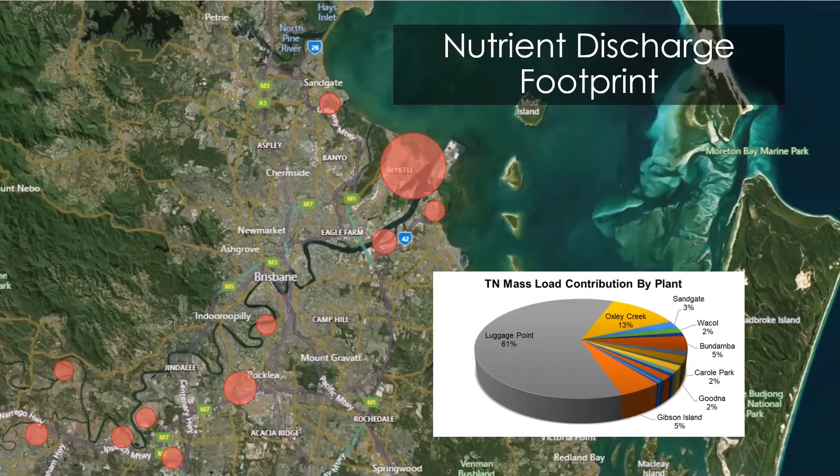Under the bubble licence, our largest treatment plant, Luggage Point, contributes significantly to the total nitrogen mass load, and its performance heavily influences our ability to meet our regulatory limits and achieve our strategic goals. Whilst there have been opportunities and we're working towards optimising the performance of our plant, with increased catchment growth, these optimisation works really end up in diminishing returns. So there's still a shortfall against our strategic target of a 10% reduction by 2023.

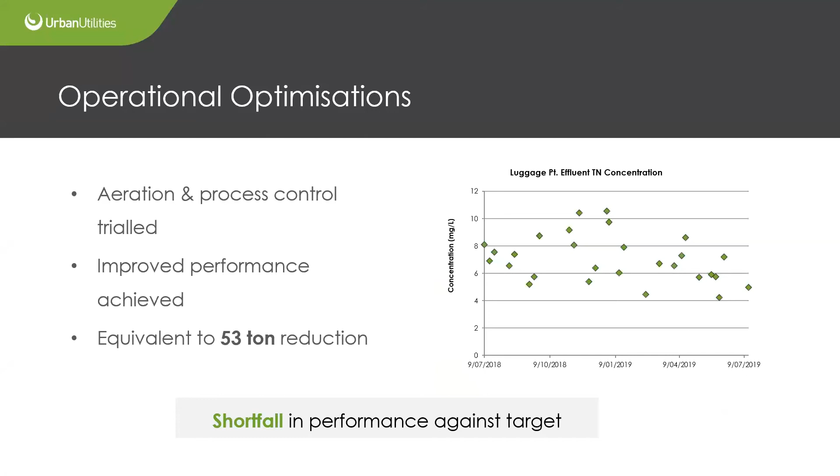Luggage Point is our largest municipal treatment facility. It treats flows based on an equivalent population of about 750,000 people. Being the largest of the 9 treatment plants within that bubble licence, it contributes significantly to the overall TN mass load, and the population growth within the area is expected to increase significantly to about 900,000 EP by 2041. Whilst there are options to meet these effluent targets through significant capital and operational investment, most of these traditional options conflict with our strategies of sustainable treatment due to the increased cost to the customer.

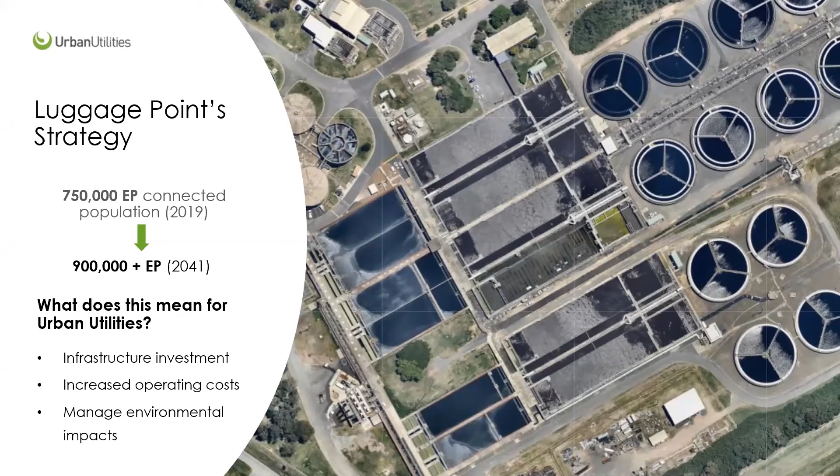Urban Utilities conducted an option assessment, and we identified the opportunity to significantly reduce the TN load, or nitrogen load, to the mainstream process by treating the side stream separately with Anammox. As is well known, the side stream can contribute around 12 to 15% of the mainstream's TN load, and therefore contribute significantly to the plant's operating costs and nutrient footprint. This technology was selected due to its ability to shortcut the nitrogen cycle using nitrite as electron acceptor, without the need for additional carbon. By taking advantage of this cost-effective biological process, it's a lot more favourable than other capital or chemical intensive solutions such as ethanol use.

Furthermore, this technology also supports the importation of co-digestion products to increase our gas and energy production on site. Although the side stream loads are expected to increase with this importation, the efficient treatment through the Anammox process ensures this strategy is sustainable on return loads to the mainstream process, and further facilitates our shift towards long-term sustainability.

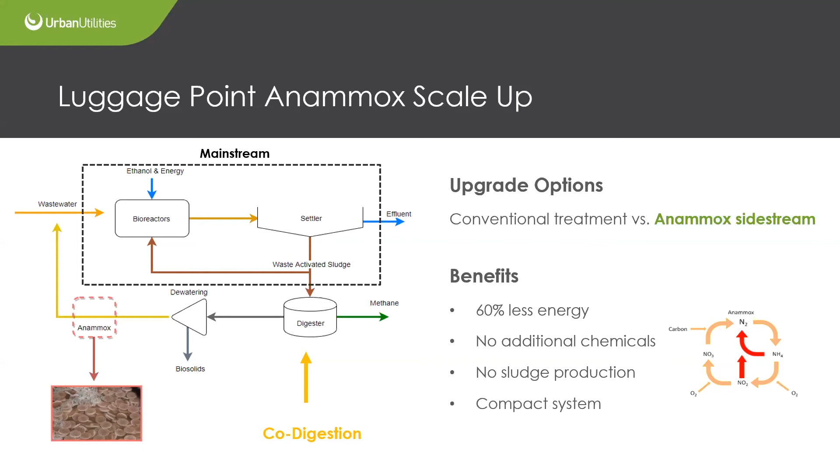Since its selection as part of the upgrade strategy for Luggage Point, this Anammox project has become an important and strategic priority for Urban Utilities, as it aligns strongly with our values, supporting our staff by giving them new technologies and upskilling. It also gives us the ability to manage our nutrients more efficiently to produce better outcomes for the environment. Finally, by reducing costs, we can provide better outcomes for our customers, and also add products and services for our commercial customers through that importation of additional co-digestion products.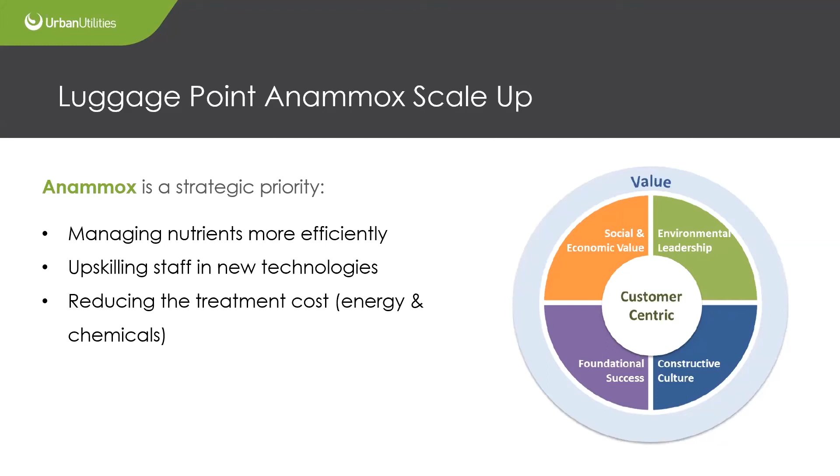So where are we at currently? It's been a long process, but we're currently delivering and installing the Anammox side stream, which is really, really exciting. I'd just like to give you a bit of an overview of where we came from and where we're at now.

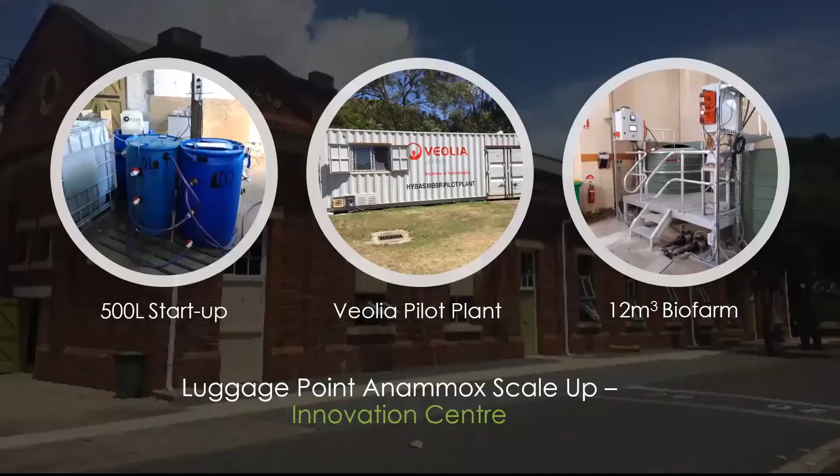As you're all aware, Anammox is a quite mature process, with plenty of installations overseas. Unfortunately, the importation of the bacterial sludge into Australia is prohibited due to our strict laws, so our only solution for its implementation was basically to grow our own. This all started about 6 to 7 years ago, as part of the Innovation Centre, which is our research centre where we partner with technology providers, like Veolia, and universities. It really is revolutionising the way that we do business, and assisting in the uptake of new technologies.

Through the Innovation Centre and the R&D team, with support from Veolia, we've been heading through this upscaling process, where we started from quite a small amount and worked our way up to provide that viable seed for the full-scale instrumentation installation.

So obviously being responsible for growing the bacteria, I also get all the experiences and all the joy that comes with that responsibility, and running the biofarms on an operational plant definitely has its challenges too. I don't think there's a challenge that we haven't been thrown at.

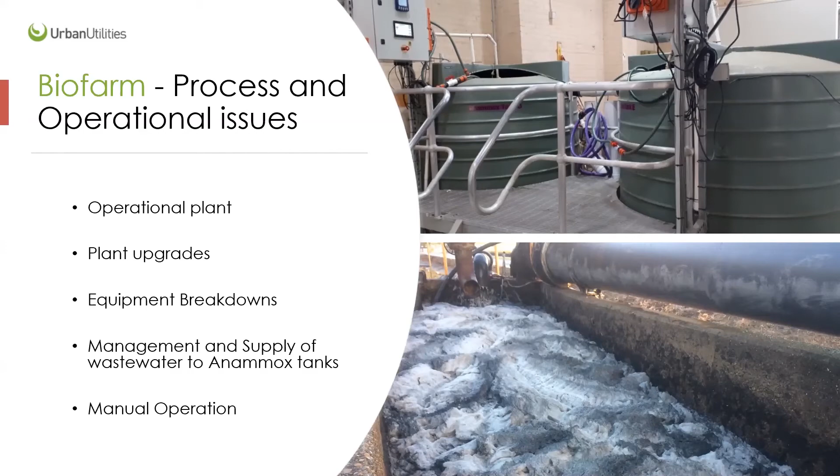So last year we engaged Veolia for the design and construct of the 50 metre cube biofarm. This is the final step in that enrichment process. Fortunately, I had graduate engineers at the time who kindly donated their time to help me transfer about 200 buckets, 20 litre buckets, of biomass from my previous little biofarm tanks to the 50 cube biofarm.

This was fully commissioned in about October last year, and we're currently on track to be fully ready, to be fully seeded prior to the commissioning of the full-scale plant.

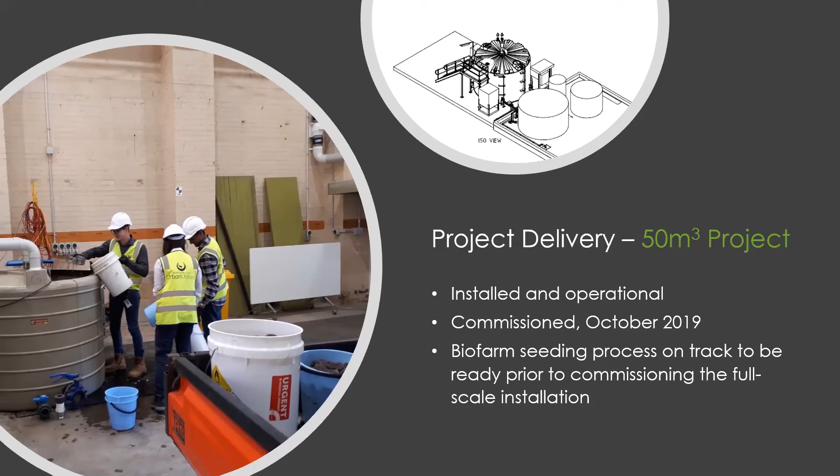So the objective of the 50 cube biofarm is essentially to provide sufficient biomass. As you can see from Romain's presentation, the success and speed of the startup really comes down to having that initial biomass to help with that startup process. But it's also provided other good things, such as upskilling the operators, getting them involved with this smaller operation, and building that confidence within the team.

The other thing I forgot to mention was we've been able to look at the operation of the plant under no heating, and also without the need for mixers for that startup period, which we've been able to successfully do.

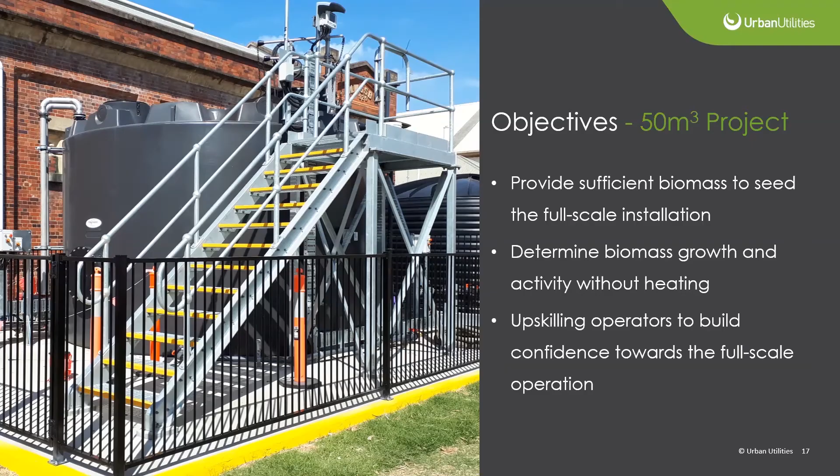So the current operation of the plant: we seeded with about 4 cubic metres of carriers. We're currently at the full carrier loading volume, and the plant is reaching loading rates of up to 40 kilograms of nitrogen per day at about 85 to 90% removal. As you can see, we had quite a rapid startup during the summer months.

Unfortunately, during February we had a big rain event, and essentially the biofarm was fed with rainwater because the centrifuges were turned off and water was being pumped into that centrate channel. This removed all the ammonia, all the food for the bacteria, and it experienced incredibly high DOs for an extended period during the night. But as you can see, it bounced back pretty quickly.

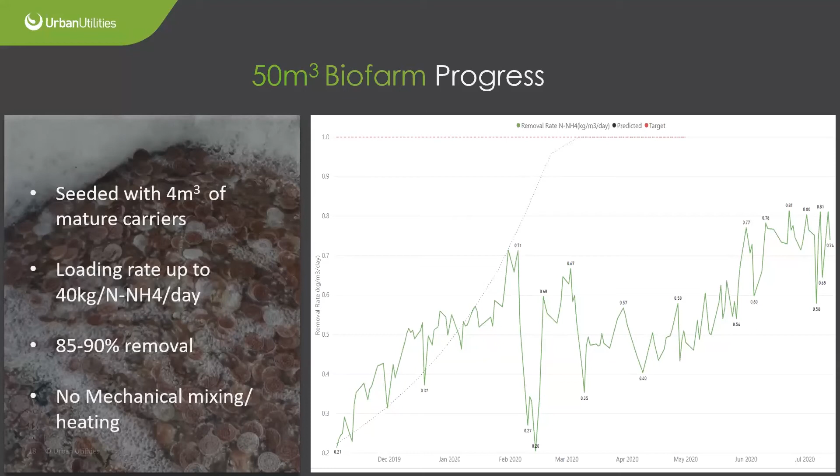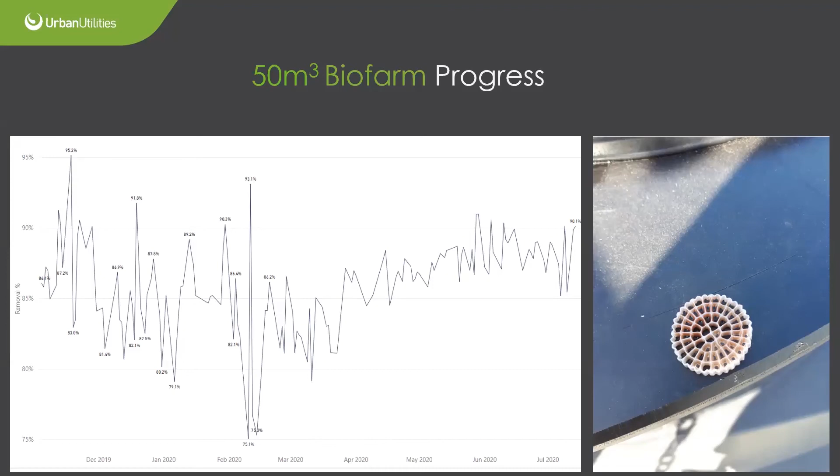Not as quickly as what we saw during the warmer months, because as I mentioned, we don't have heating on this biofarm. But we're basically seeing really good sustained removal rates now, and we're near the end of the seeding process. This just demonstrates that really good removal rate we were seeing, between 85 and 90% of ammonia.

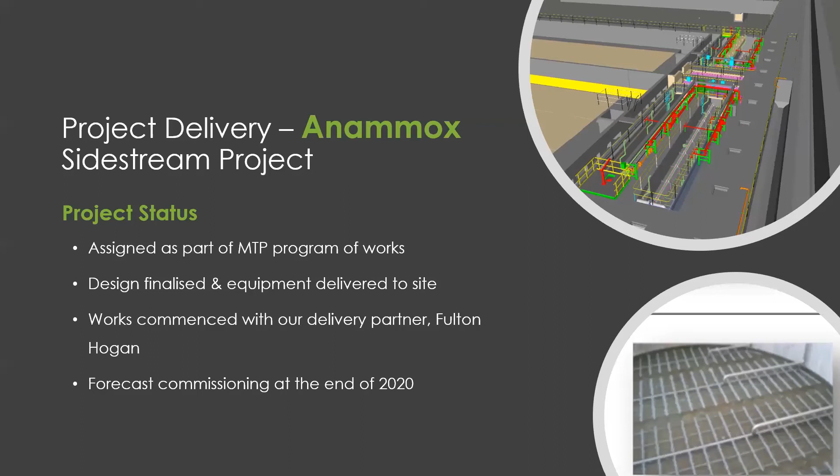So where are we at now? We're currently in the stages of delivery for the ANITA Mox sidestream project. This has been assigned as part of our MTP program of works. The design's been finalised, equipment delivered to site recently, and works have commenced for the balance of plant construction with our delivery partners, Fulton Hogan. We're forecasting commissioning at the end of 2020, which is really exciting.

So the design of the ANITA Mox sidestream - we're currently retrofitting old pre-aeration tanks. That's obviously the benefit of using a carrier-based process: we're able to utilise existing assets.

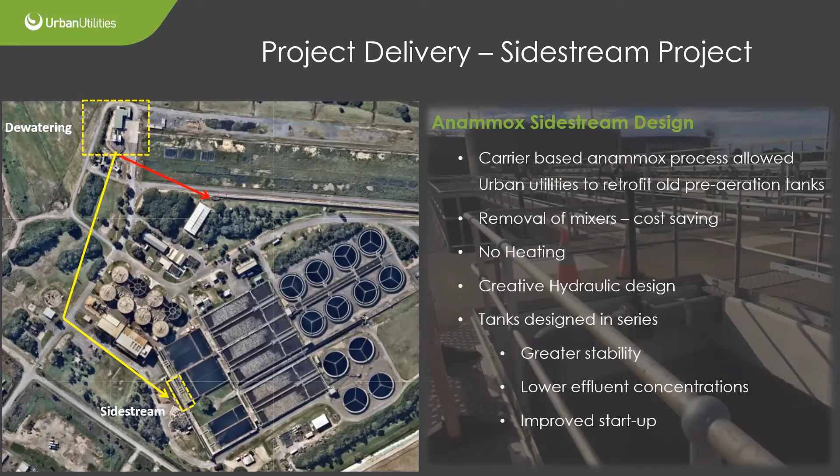During the design process, we were able to save significant costs by looking at the removal of mixers and also providing no heating, which we've established is perfectly fine for that startup and also the operation of the biofarm. It was really good to work with Veolia. They provided a really good creative hydraulic design, which allowed the tanks to run in series, giving greater stability and lower effluent concentration, and really helping with improved startup by being able to seed the front tanks - any bacteria that sloughs off then grows within that first tank, which allows seeding of the carriers in the second tank.

So the design of the outcome, the process design - we're expecting the reactor volume is about 1 meg. We're expecting to treat just about 1 meg a day. With achieving that 85% removal, we should see a massive reduction of 850 kilos of nitrogen per day.

This is anticipated to provide significant cost savings of up to $500,000 a year, primarily due to reduced ethanol dosing. The new exciting thing is that this will actually be able to be used as a biofarm to help other utilities if they wish to take up this technology. It really does help with that startup process to kickstart the actual process.

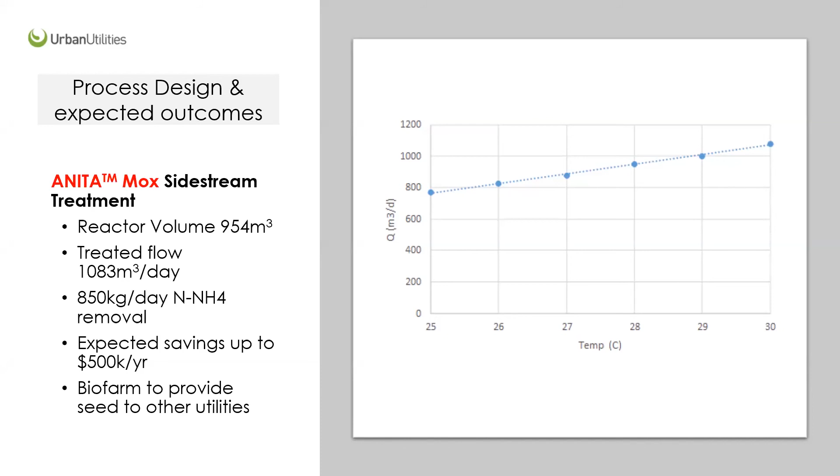So overall, this is a really great project that I'm really happy to be involved in.

Essentially, what ANITA Mox does for us is it allows us to utilise existing assets, which enables us to unlock capacity within our plant. It also, because it is a relatively new technology within Australia, gives us a better understanding. It gives the business confidence to pursue some of these emerging technologies, which ultimately provides better outcomes for our business and also the customers and the environment.

With that, we should be seeing significant reduction in the cost of treatment. Through this upscaling process, although it's been a long period, it really has supported the development of skills within our organisation, so that we should be really confident in running the full-scale installation and achieving and being able to realise all the benefits that come from installing an ANITA Mox plant.

Finally, I'd just like to thank everyone that's been involved with the project so far - the research and development team, the operators at Luggage Point, infrastructure delivery and procurement, University Technology, and in particular Veolia Water Technologies, who've been really integral to the delivery and support to get this project off the ground.

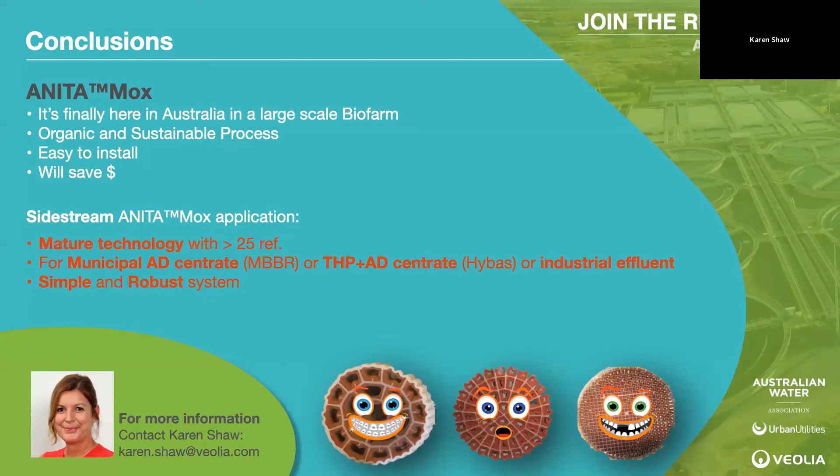But in conclusion, ANITA Mox, it's finally here. As Justin said, the full-scale treatment plant at Luggage Point will be run as a biofarm, so there'll be seed available for other plants. As I mentioned at the start, and both Romain and Justin have said, it's an organic, sustainable process. So you're going to see a lot of benefits, not just financial, environmental as well.

It's very easy to install. We really understand what we're doing now. And it makes a lot of financial sense to install at a wastewater treatment plant. So it's really worth looking at.